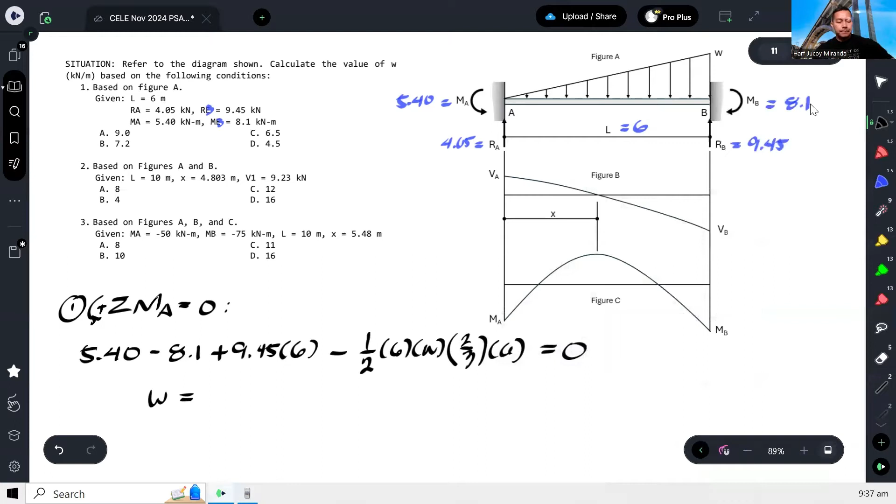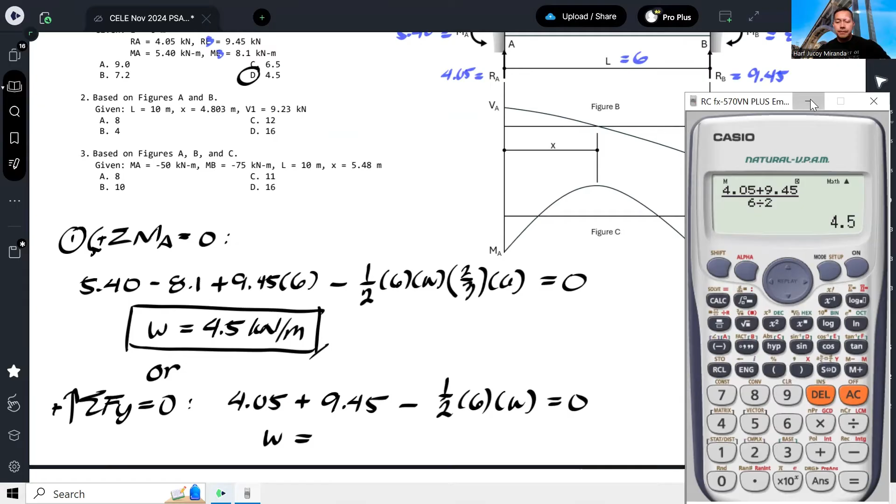And we already have an answer for number 1. Or, as I said, you could use summation of forces Y equals 0, which is easier. RA pointing up, RB pointing up, then the triangular load pointing down: 1/2 base times height equals 0. This is easier, and you'll get the same answer, 4.5. So that works for number 1, it's up to you.

Next, based on figures A and B, you're given different data. I'll erase the other figure so it doesn't get confusing. So we'll focus on number 2 here.

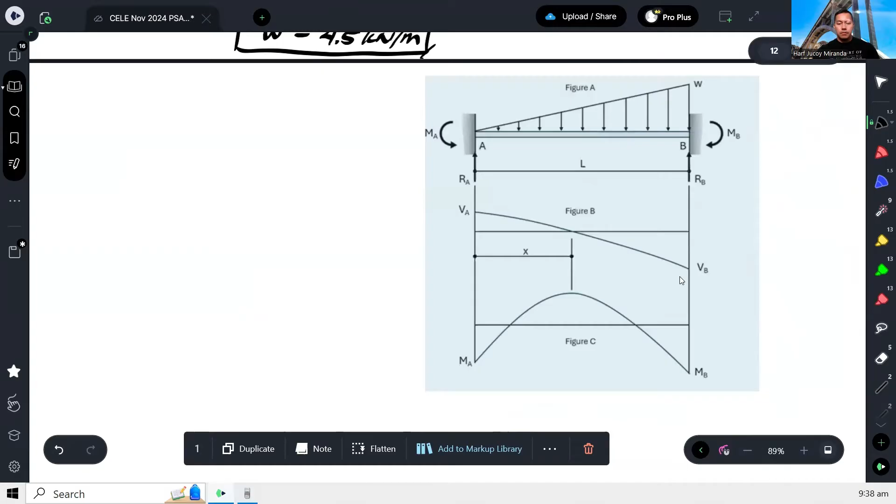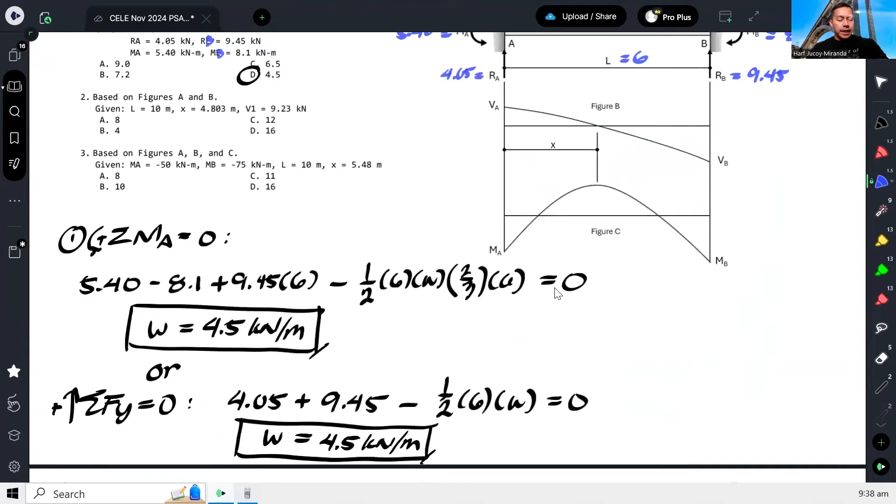For number 2, we're given L equal to 10. Then X is 4.803. Obviously, X is the location of the point of zero shear. Then V1, actually that's a typo, it should be VA. VA is 9.23.

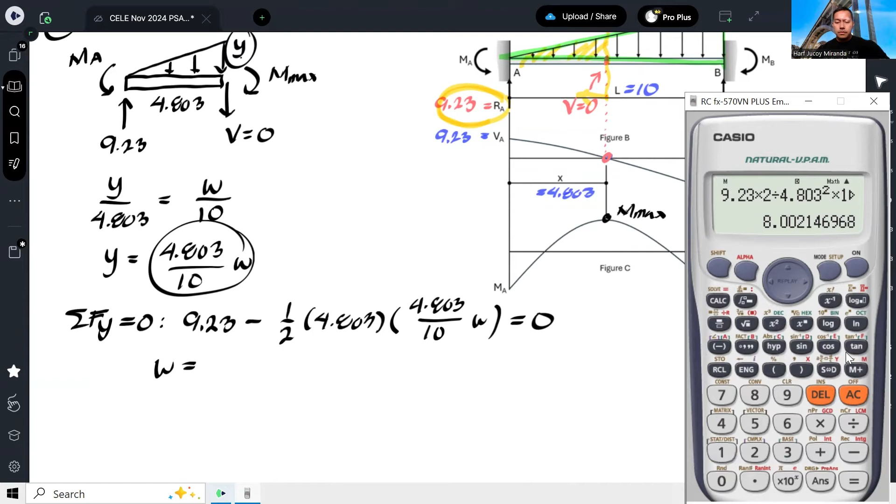So, that gives us 8. Hence, our answer here would be letter A.

Next, based on figures A, B, and C. So again, we're given the moments, as well as L and X. Let me just have another figure.

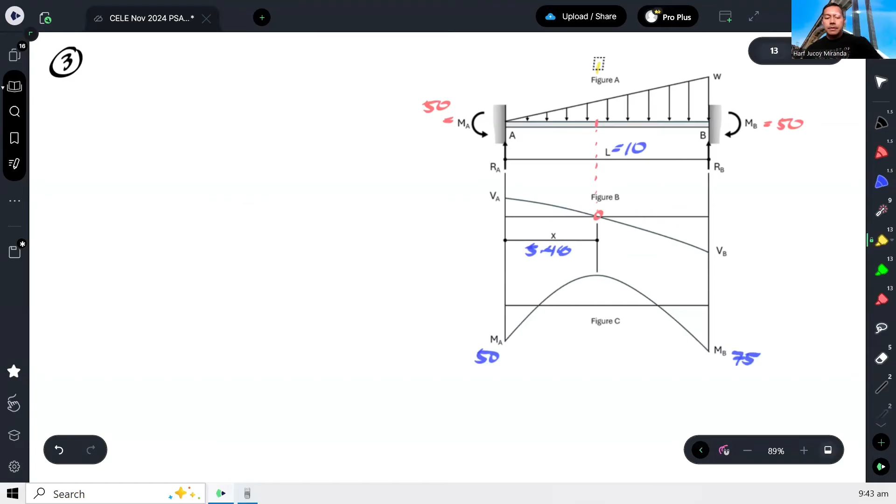So here we have RA, and the moment at A, which we know is 50. Let me put in the value. Then we have a triangular load here. The shear here is 0, and there's a moment here. Then this is 5.48.

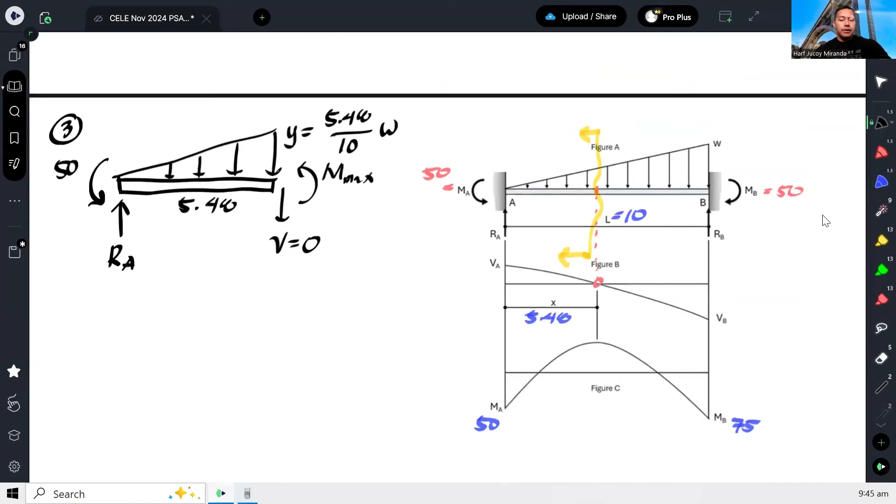We can look at this—sorry, what is this, 75? Okay, we can look at the whole figure here. In total, we have the end moments here. So actually, we can solve for RA by taking moment at B.

Now, we can solve for RA by taking moment at B. From the whole beam, let's take summation of moment at B. If we take moment at B, let's assume counterclockwise is positive. So 50 minus 75, then RA's moment arm is 10, and the rotation is clockwise, so minus. Then the triangle, 1/2 base times W, and the moment arm from B is 10 over 3.

Let me repeat: 50, 75, the reaction at A, then this. That's it, and this one is counterclockwise, so plus. All equal to zero. So here, guys, we can solve RA in terms of W, which is good because it minimizes our unknowns.

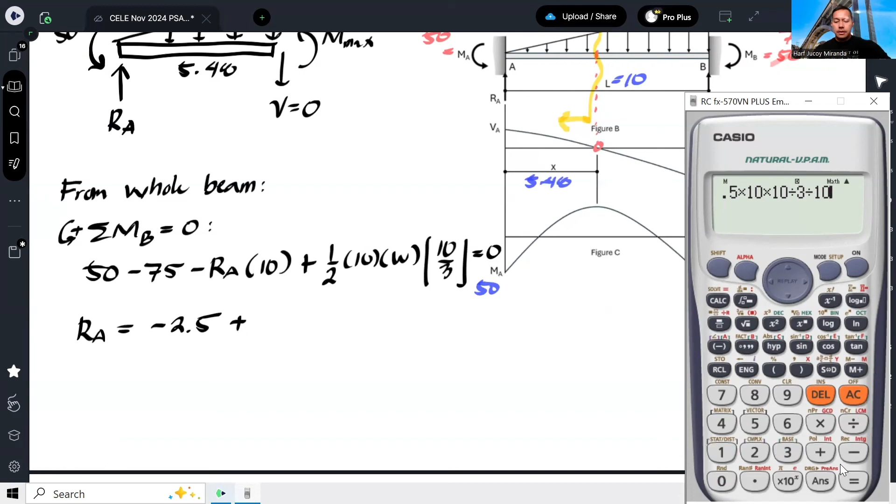Again, that solves for RA. Now that I have the value for RA, let me go back here. My RA is negative 2.5 plus 5 over 3 W. Since I have that now, I can solve for W by simply taking summation of forces. Why forces? Because if I do moment, I have an unknown moment. But with forces, my only unknowns are RA in terms of W and Y also in terms of W, so we can solve for W.

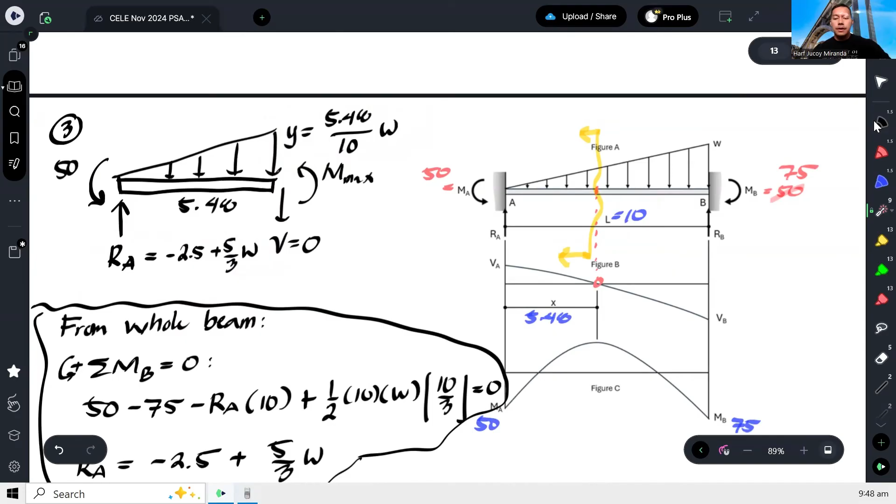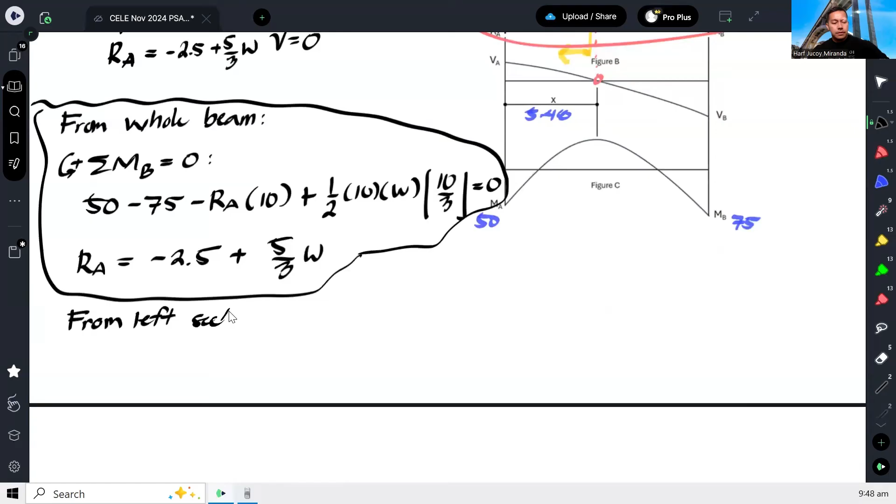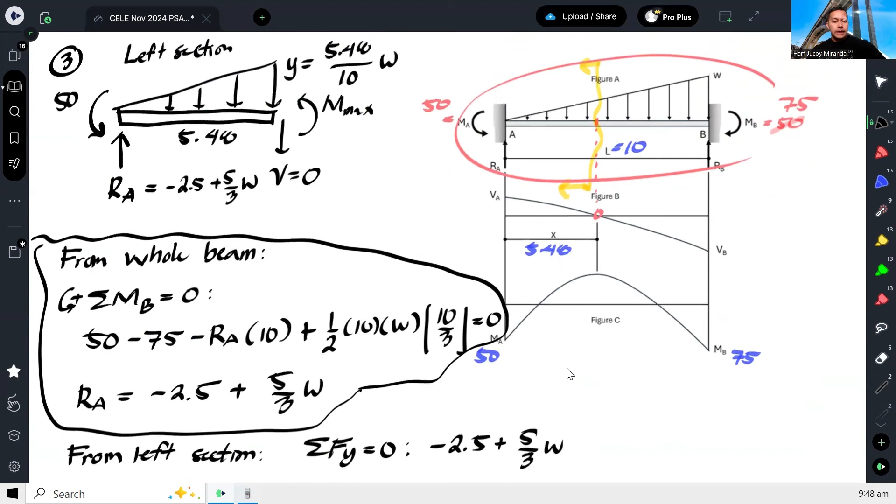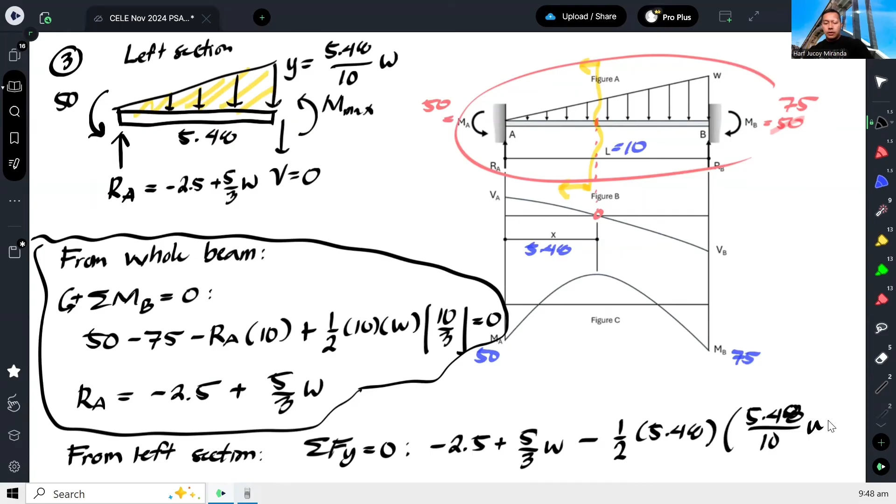So, left section. From the left section, let's apply summation of forces Y equal to 0. We have RA going up, and then pointing down we have the area of that triangle: 1/2, base is 5.48, height is Y, which is 5.48 over 10 times W. That's it, all equal to 0, since we don't have shear here.

And from here, we can solve for W.

Okay, hold on a second, let me double check. This is negative 2.5, 5/3. This is 5.48 over 10 doubled, so 1/2 base times height. That's correct.

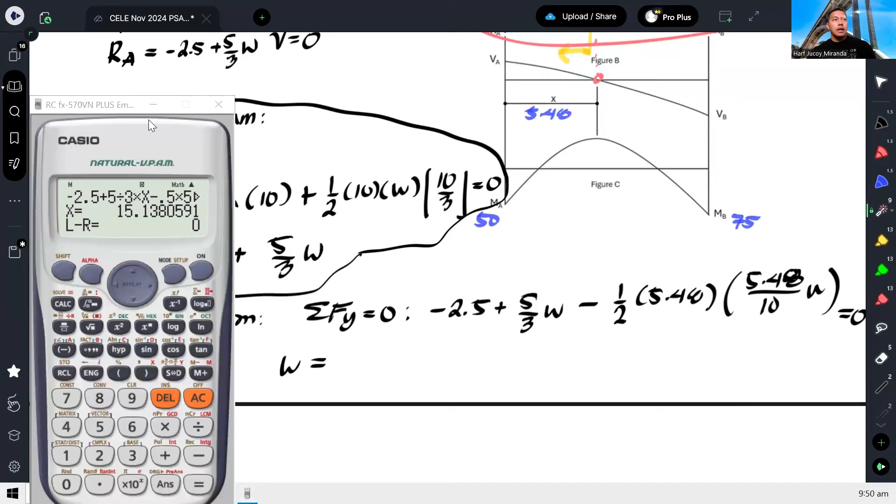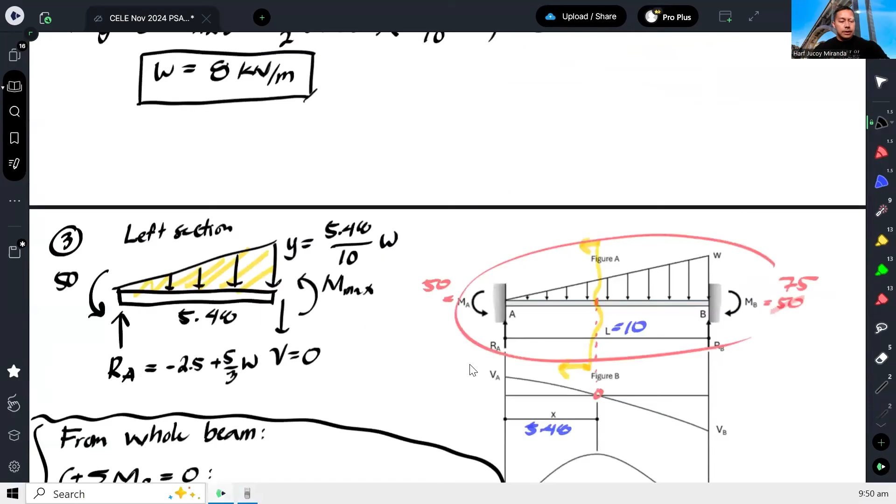Okay, so that should be 15.14—so that's correct, 15.14 kilonewton per meter. Okay, so the answer here actually should be 15. So the answer should be 15, for this situation.

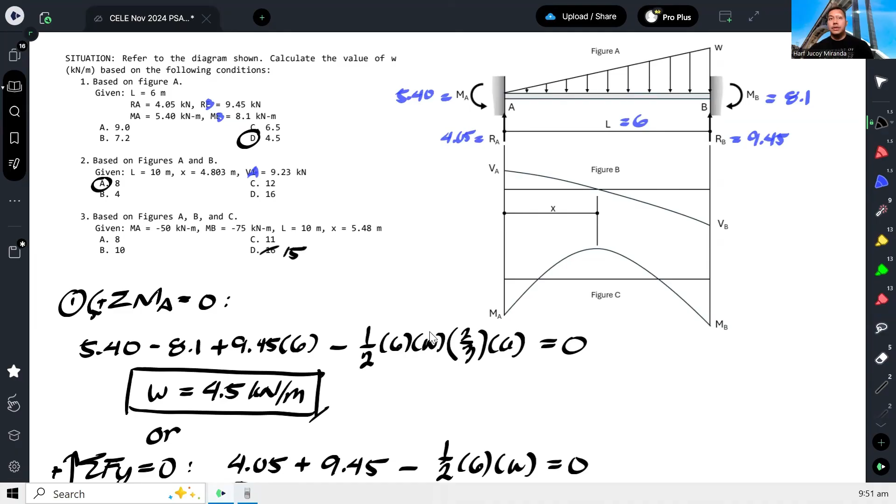Okay, so that's how we solve this problem.